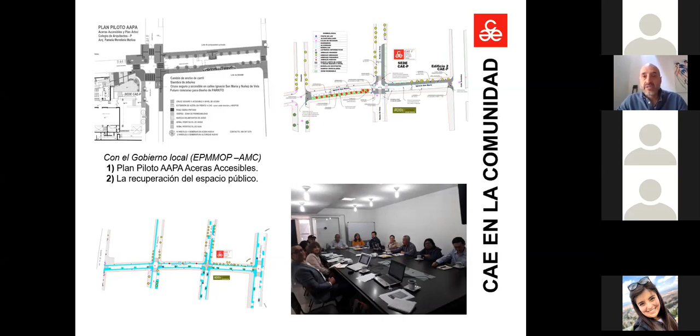There are various professional people working on this, anthropologists, engineers, working with the Association of Architects on this continental campaign, which was started by the Pan American Association of Architects, along with our initiative, with one architectural tree. Through this association, our goal is to distribute trees to different members of the association.

Along with the community, there's the CIUQ, Center of Urban Information of Quito, which includes architecture, landscaping, urban planning, land use planning, and the real estate area, which includes biologists. This is related to the scientific knowledge that we are interested in applying through this project.

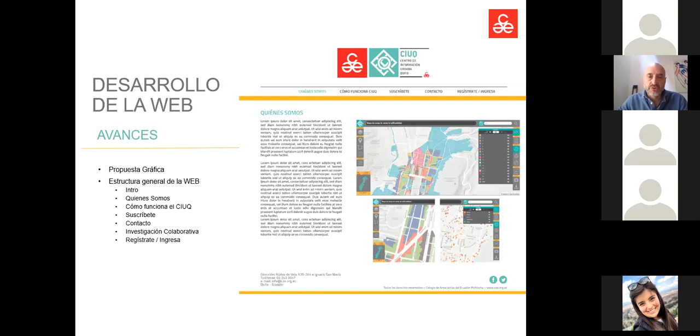You may also know about our webpage. On the 20th of August, we will be able to launch this project and you will be able to participate. It would be very opportunistic for us to have your participation when we launch this project, and we'll be available at that time to form agreements for mutual collaboration to take this project forward.

This is the development of the geo portal, with different maps and the use of this land, formation of buildings, and compatibility of the grounds. Through this project, it would also be very important to have some space to show you this as well.

This is a collaborative investigation, and we have worked with the ESPE. We've also had support from the FLACSO University and from the Catholic University, which also would like to support this project, entering into the pilot program of reinforcement of structures.

This was formed during the Forum of the City, which we have participated in. It has been part of the Association of Architects for more than 15 years, where we have worked on various proposals. On this occasion, we decided to do a practical project that would also be used in the reality we're faced with.

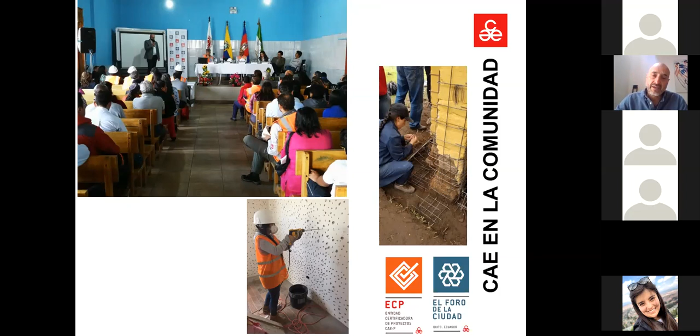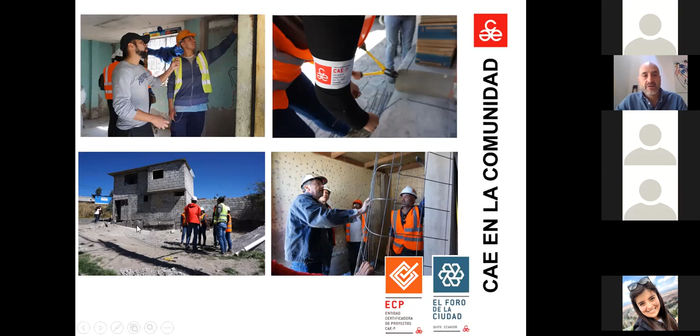Here is someone working in one of the houses where we did an intervention, which did not have adequate rooms, ventilation, lighting, or areas outside of the building.

And so this was the constructor that we contracted so that he could be part of this initiative. His name is Patricio, and he has a lot of experience consulting with the United Nations organization. So after the earthquake in Mexico, he was taken there to work on reinforcement of buildings. And this is why we wanted to work with him along with the Polytechnical University.

He did an investigation along with us in order to do the theoretic part and then apply all that we had studied, so that the architectural project is not just about the physical work, but about the knowledge of the engineers and that it's applied adequately. So the Association of Architects have also worked a lot with the media, which is indispensable.

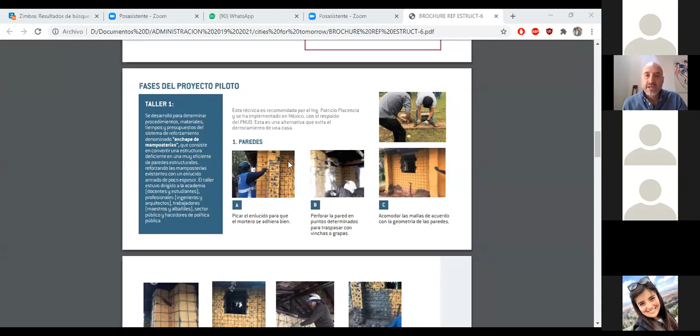This is a recreation using adobe, which is used with metal, often used in grills, which is an experimental method to reconstruct this building. There are teachers, professional laborers, and teachers as well involved in this process.

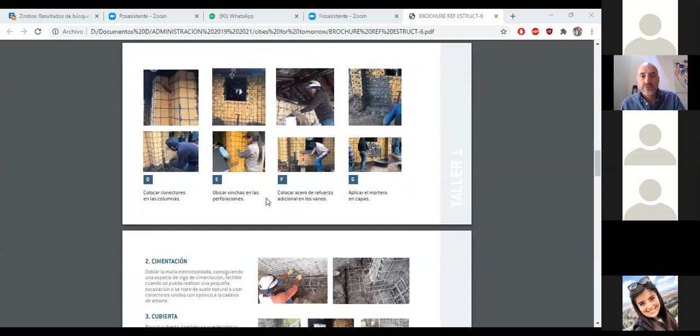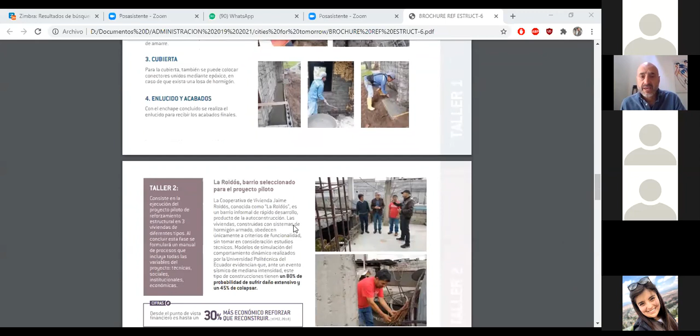In the architectonic perspective, this is a wider space than in the previous picture. And here, this has been replicated with the cementing and the covering of the building.

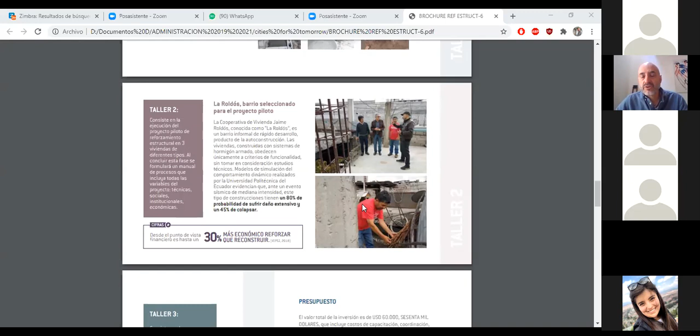Here we have the president of the community who talks with the different owners of the buildings and how we could apply this to their housing structures.

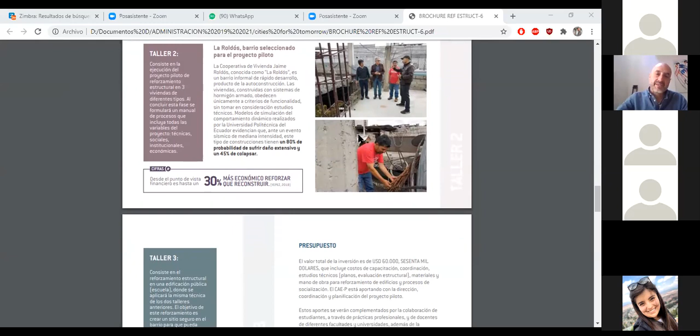And the next phase is the reinforcement of public buildings. This project doesn't want to stay just in private buildings, but also work with public buildings in parks.

What we saw is that in public schools, commonly, they have structural buildings that are repeated throughout the country in the same way. So if we could achieve this through restructuring buildings in an educational way, it could be replicated in other parts of the country.

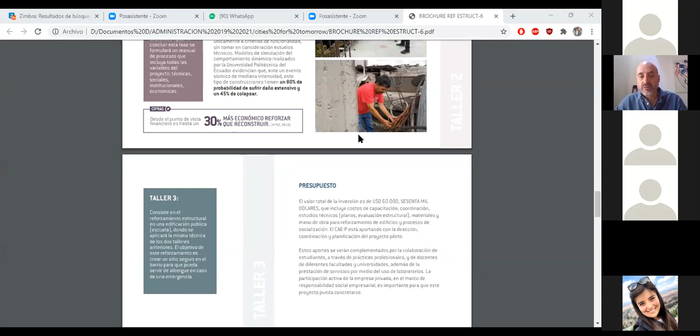This phase we have not been able to do for lack of resources, because although the value of this project is not a lot, with these hard economic times it's making it difficult. The municipality has to give us 50% in order to do this project, so we have not been able to finish it, but this is the third phase, to make a school.

So there's different packets that we have presented to the private sector, and there's been interesting proposals through the private sector talking about the different materials that are used for the project and being able to obtain them. So there's a different value here for these different packets that are available.

So to finish here, I would like to show you these quotes. And this was the reason that we chose to do this project, which we think is fundamental and necessary.

It has not been able to be completed through the public institutions, but in the earthquake of 2016, there were 677 deaths and a loss of over $3,300,000,000.